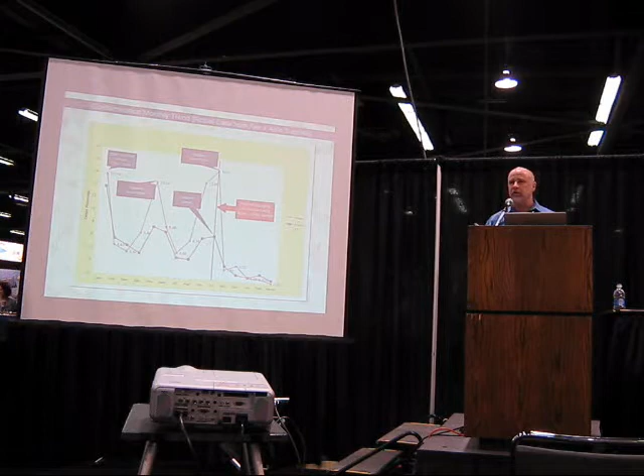So what I'd like to give you today to take home is, if you have high scrap rates, this is achievable. We can't guarantee these results in every application. There's no guarantees — every application is different by machine, resin, and so forth — but you can improve.

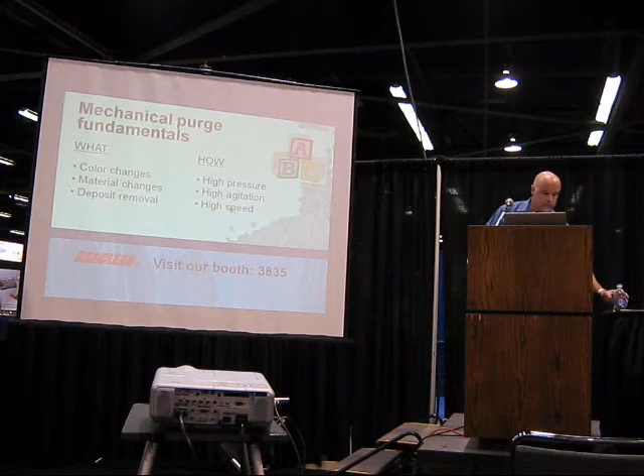So the hows of purging — what are we really talking about? Generally speaking, when you're talking about purge, there are three major categories: color change, material change, and deposit removal.

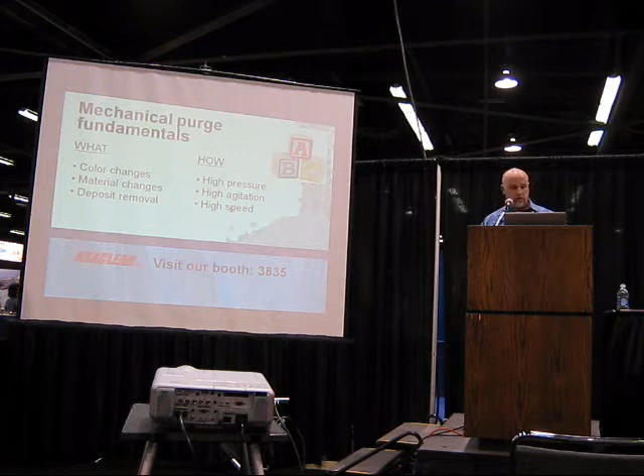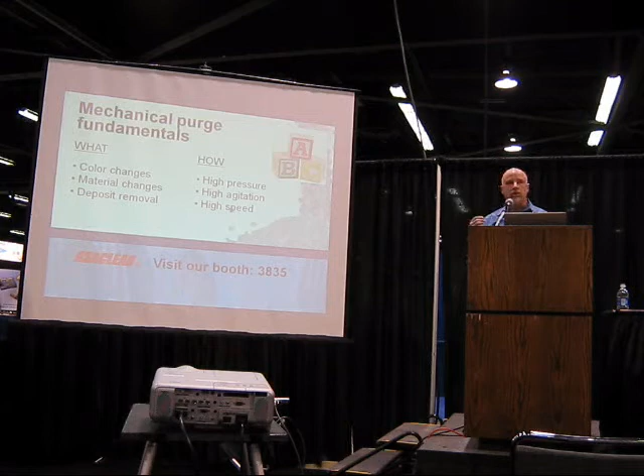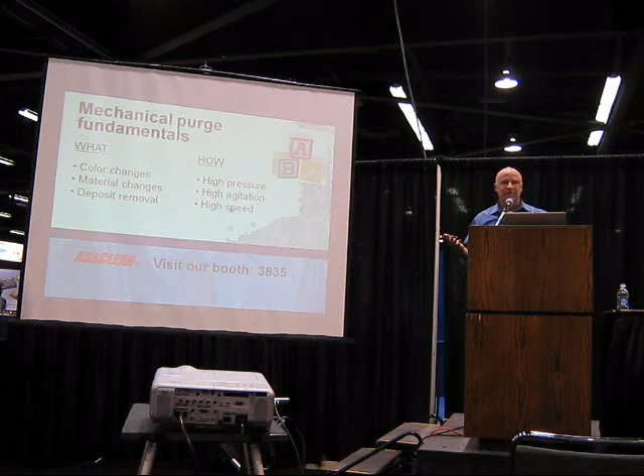When you're talking about a mechanical purge compound, you're really scrubbing — you're cleaning the machine in a mechanical way, not in a chemical reaction process. So to maximize that cleaning, you want to use high pressure, high agitation, and high speed. Think about cleaning anything: if you're cleaning dishes, you're scrubbing with high speed and pressure. Same with washing clothes or windows — it's the same principle for an injection molding machine in a mechanical cleaning process.

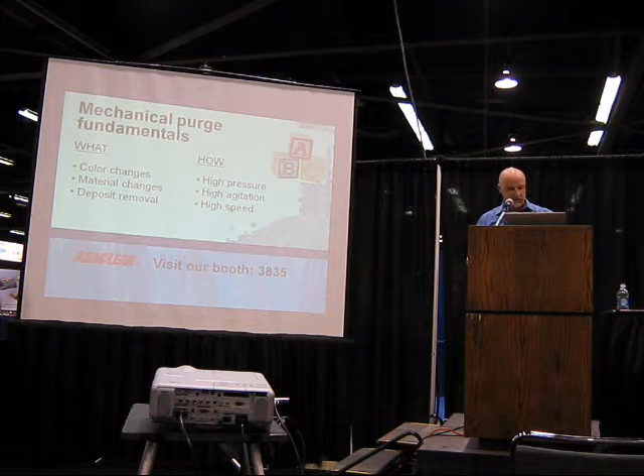So whatever your cleaning application is, you want to maximize those three things specifically. I'm going to talk a little bit about how to do so in your particular application.

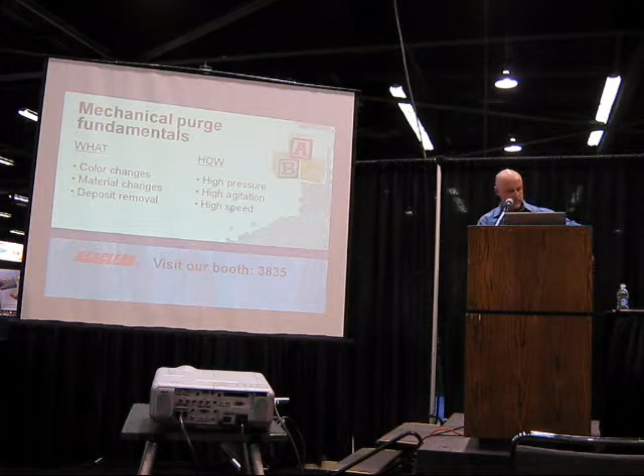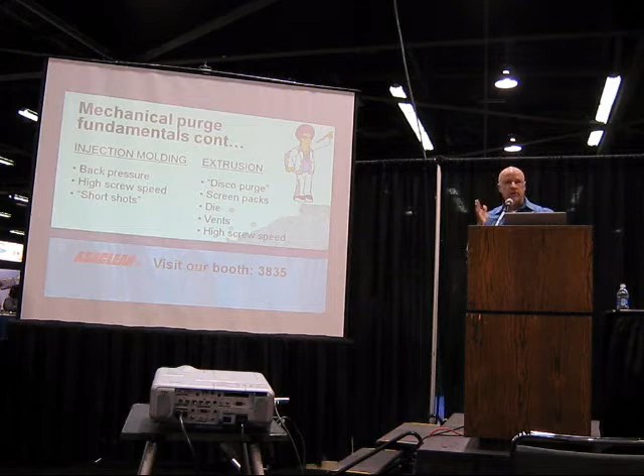So, injection molding — the first part, injection molding on the left. Generally speaking, it's a little easier in an injection molding process to maximize those three things: high speed, high agitation, and high pressure. So the first thing we want to do is keep that screw forward.

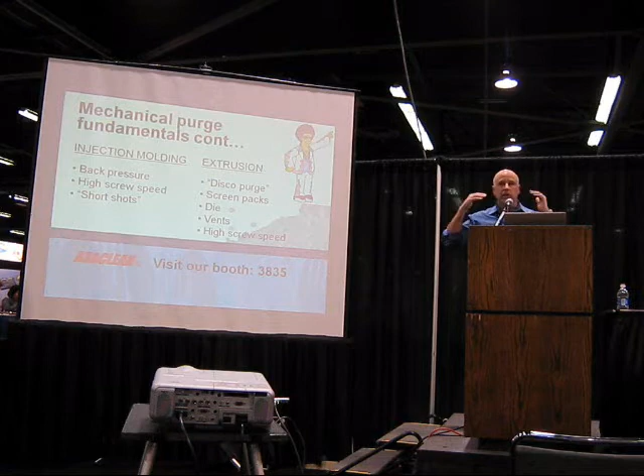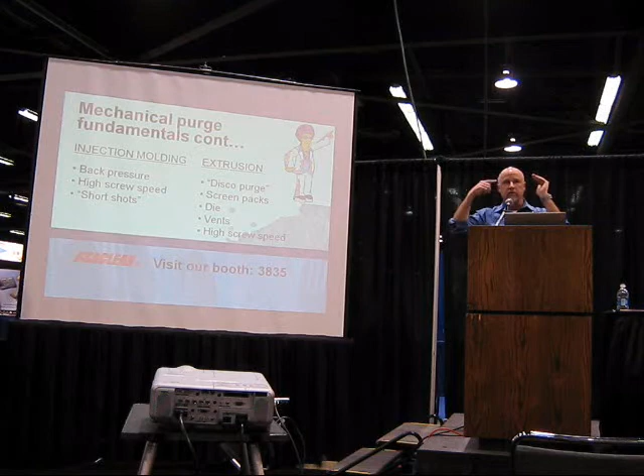Why? Because a lot of the hang-up in an injection molding machine happens at the nozzle area. So if you're using a purge compound to clean that machine, you want to seat that screw as far forward as possible so that when it's turning, it's creating pressure and agitation in that nozzle area. If the screw is not forward, if it's further back and turning, you're going to get very little pressure and very little agitation in that front area.

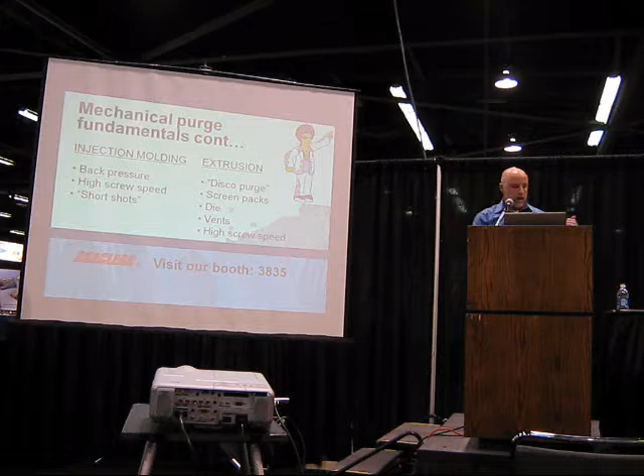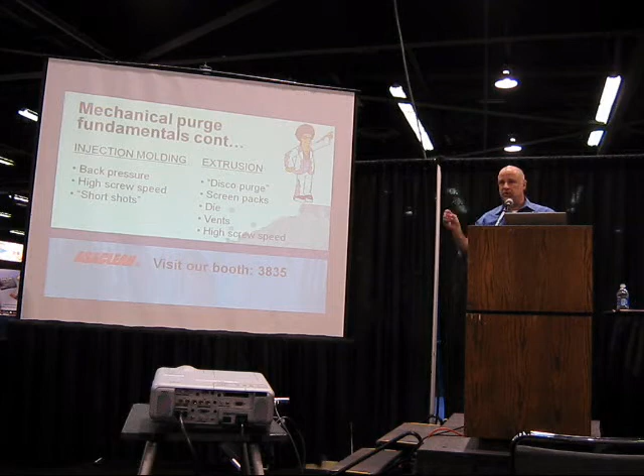So it's important, where possible, to put your back pressure all the way up and get that screw all the way forward. Now, we do often hear from customers that they can't keep back pressure up — when they try, the screw floats back. It happens a lot. One trick we've found to keep that screw forward is to set your shot size at or near zero. By doing so, the machine understands it's only pulling the screw back this far to make a shot, and that way you can keep that screw forward.

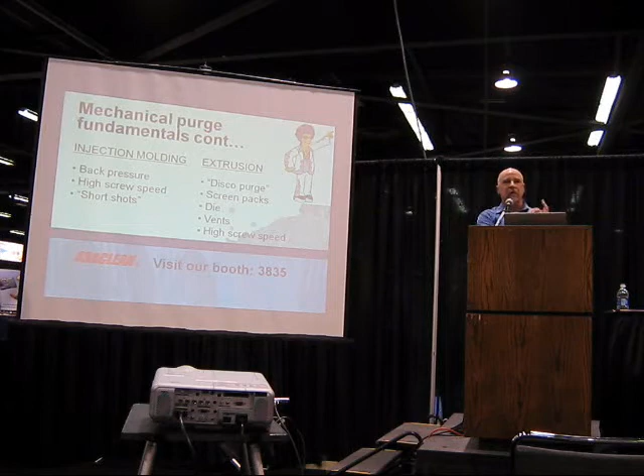So that's the first part of injection molding when you're cleaning the screw and barrel. The second part is high screw speed — of course, high safe screw speed. You guys know your machines better than anyone, so make sure you're using a speed that generates as much pressure and agitation as possible. With that high screw speed, you're going to get a lot of agitation at the front of the nozzle, all along the screw and in the barrel.

And then finally, short shots. What we recommend to do is extrude the purge compound through your screw and barrel at high speed, high pressure with the screw forward. Once that extrudate comes out clean and it appears you've removed all the contaminants, the previous resin in your machine, do short shots.

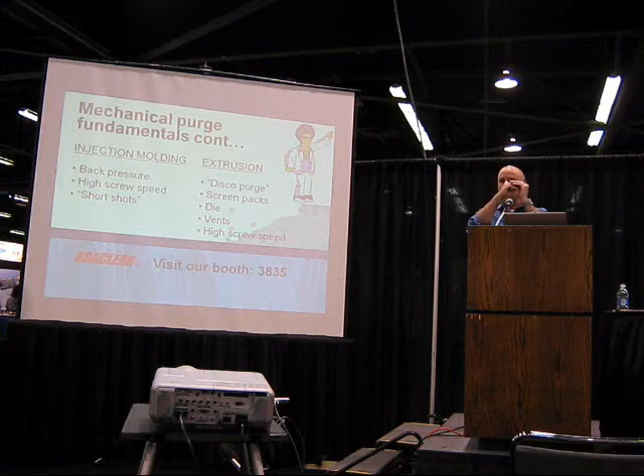Pull the screw back and do several short shots. What will happen is those short shots will really increase the velocity, the pressure, the speed, agitation at the front of that machine. You'll clean the check ring, you'll clean the nozzle, you'll really get that front area clean, which is a troublesome area because a lot of time that's where you get dead spots, where you have low pressure in general, so a lot of buildup happens there.

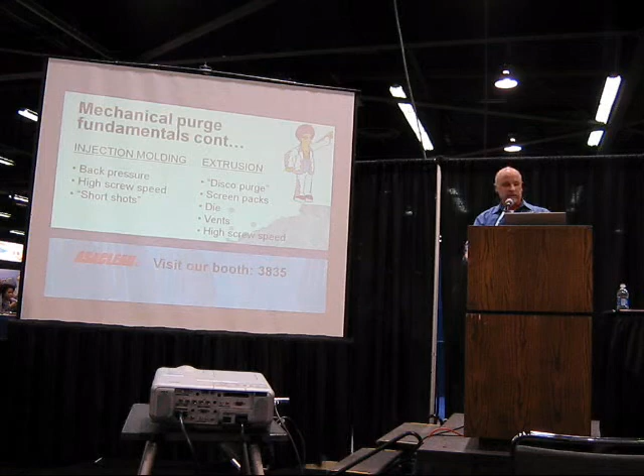Extrusion. Some time ago, someone came up with the disco purge method, which means really a stop-and-go kind of purging. With extrusion, you can't move the screw, so you have a bit of a disadvantage trying to create pressure and agitation. So there are ways to maximize pressure and agitation even in an extrusion machine.

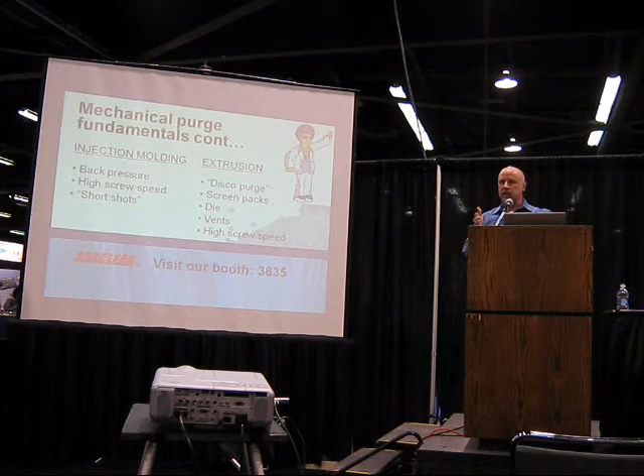One thing the disco purge means: you empty the screw and barrel of the previous resin, introduce your purge compound, and once it's coming out, stop it. Just stop the screw for a moment, not a minute, 5 minutes, 10 minutes, just a moment. Then restart it. What will happen is while that purge compound is stopped in the machine, when you start the screw again, it's going to torque against what's sitting in the machine.

So it's going to force that to start moving. While you're extruding it out, it's moving along smoothly going through the machine. But once it stops, you've got to start it up again, and that's going to help you maximize that kind of scrubbing action.

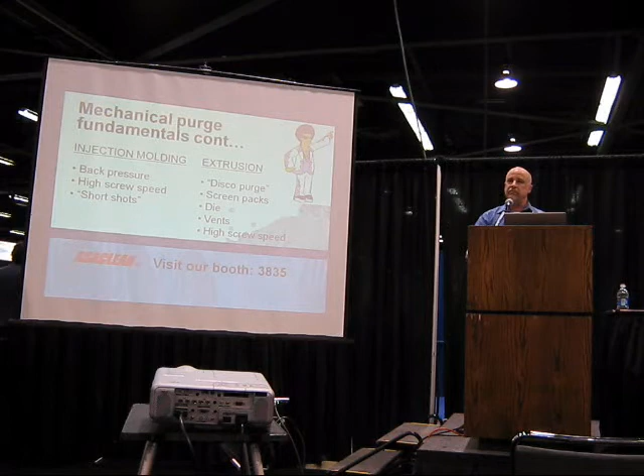So how often do you need to do it? Depends on your process, but you can experiment with it. Try it a couple of times, see whether you need to stop it once, twice, 3 times, or perhaps not at all.

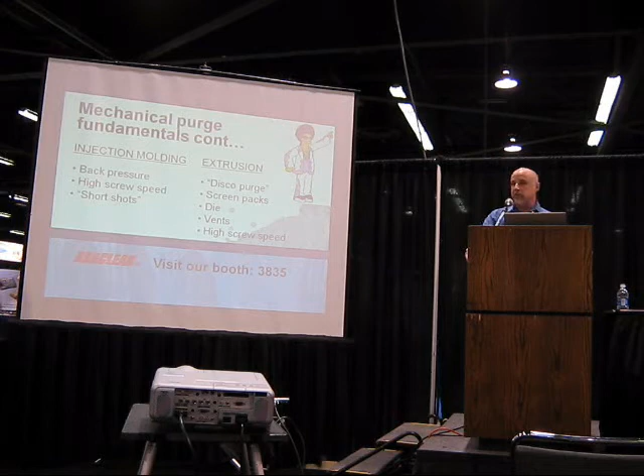Screen packs. Many companies say, oh well, I'm purging, I have to take out the screen pack now. Maybe, maybe not. The screen pack helps you create resistance to the resin going through the machine. If you've got resistance, then you've got pressure, and that's going to help maximize the cleaning, scrubbing process.

So you need to check clearances. If you have a very fine mesh, maybe you need to take it out, maybe not. If you can leave it in, we recommend to leave it in. After you're done with the purge and you're ready to go to the next resin, then you do your screen pack change. If your screens are too fine and you can't keep them in there, what we recommend where possible is take out the screens and put the breaker plate back in, because at least with the breaker plate in there, you'll still have some resistance and create some extra pressure as opposed to not having anything in there at all.

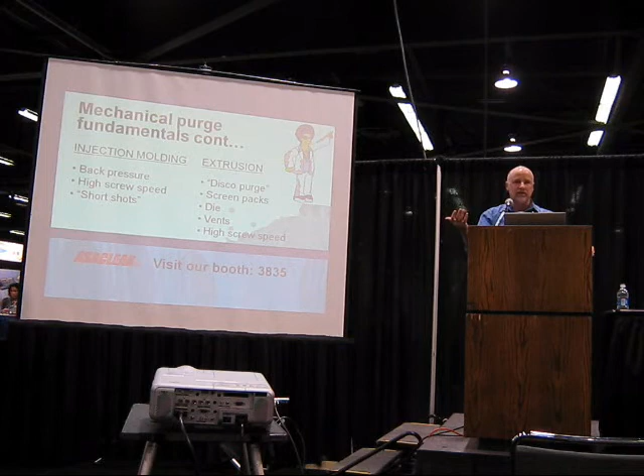The die. In some cases, people have a die that's easily adjustable. They can narrow the orifice of the die. Where you can, we recommend to do so. If it's a big process that takes a long time, of course not. But again, if you can narrow that die, you can create more resistance and more pressure.

Vents. If you have a vented machine, very often that's a place of contamination because that's where pressure drops. When we clean, we want to keep that pressure up. So if you have a machine where you can close the vents, you should do so, and that will help cleaning through the whole machine, but specifically in that area.

And then finally, high screw speed. Again, with that material going through quickly, you're going to get more agitation, more scrubbing.

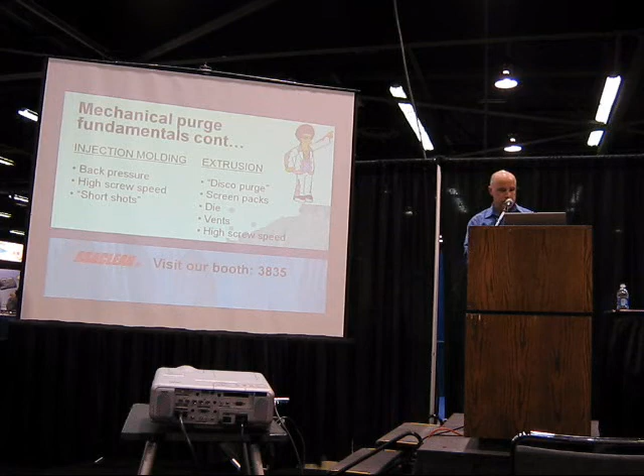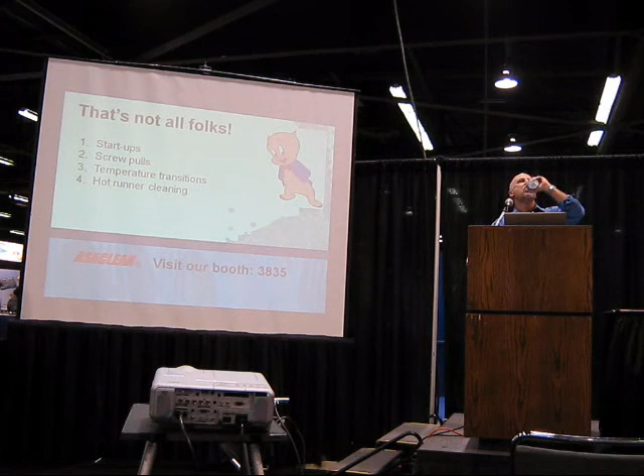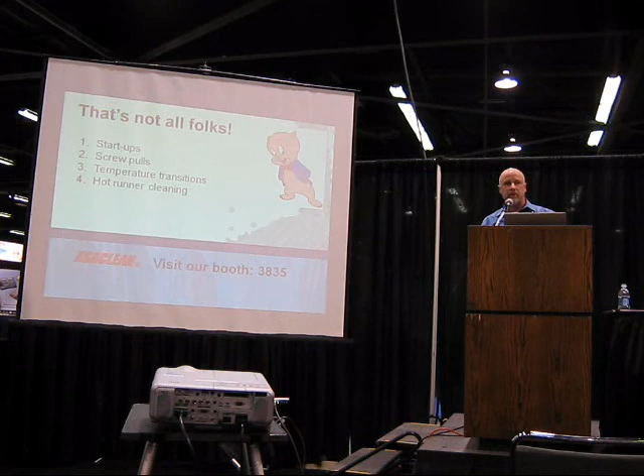So we talked about the 3 major uses of, or major times when you use a purge compound: color change, material change, and deposit removal. But there are a lot of other times when a purging compound is going to really help you save money and save time. Sometimes people don't really think about it, but startups, screw pulls, temperature transitions, and hot runner cleaning.